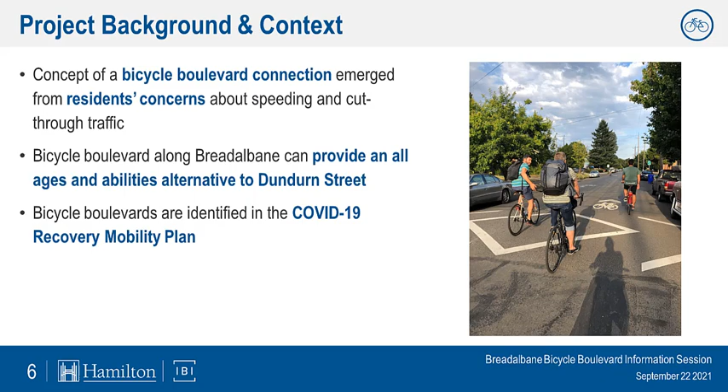So why are we proposing a bicycle boulevard along this corridor? This is really in response to concerns from residents about speeding and cut-through traffic along Breadalbane. We see an opportunity to tie together improvements aimed at managing vehicular speed and volume. This will also help us create an attractive, all ages and abilities cycling route. And I'll note that bicycle boulevards are also identified as part of the city's COVID-19 recovery mobility plan.

Our project objectives include expanding the citywide cycling network with connections to existing east-west cycling facilities on King and York, enhancing corridor safety and livability by calming vehicular traffic volumes and speeds, incorporating beautification, and using a pilot project approach with rapid implementation to grow our understanding of bicycle boulevards and how they work in Hamilton, and to test new design elements.

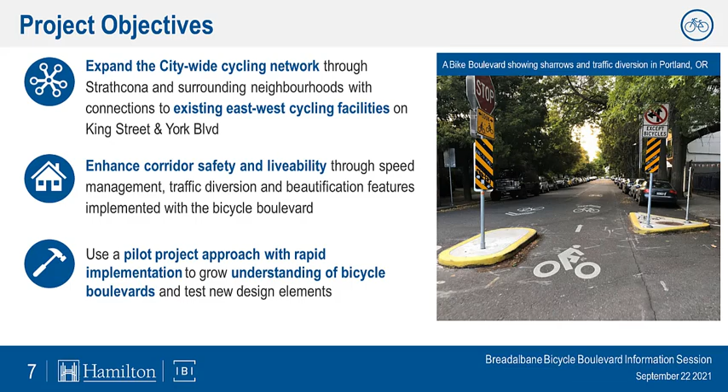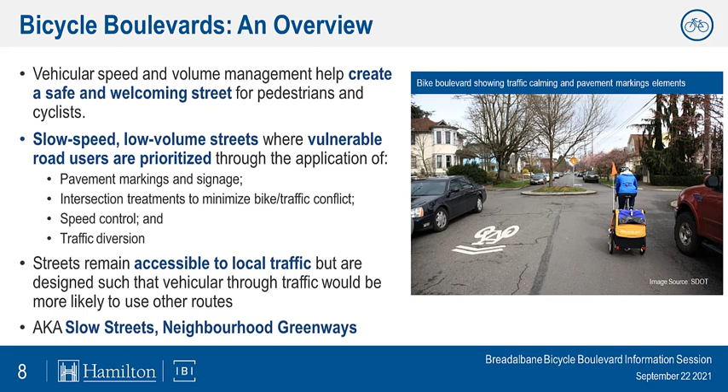So what exactly are bicycle boulevards? These are not the same as other forms of cycling infrastructure you may have seen around the city, such as bike lanes—they do not provide dedicated space for cyclists. Instead, vehicle speeds and volumes are controlled to help create a safe and welcoming street for both pedestrians and cyclists, with cyclists sharing the road with vehicles. These are slow speed, low volume streets that incorporate various treatments depending on operating conditions. You may have also heard these referred to as slow streets or neighborhood greenways in other cities.

So I mentioned the range of treatments that may be considered along a bicycle boulevard. Typically, they will always include the first two levels: signage and pavement markings. These help guide users along the corridor, consisting of wayfinding, directional markers, and bike route signs. Depending on the specific conditions within each block, other elements including intersection treatments and speed management or traffic diversion may also be considered.

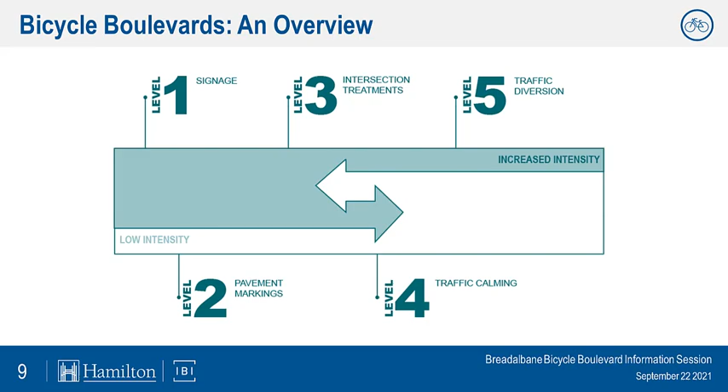So let's walk through the proposed changes along this corridor to give you more detail on how these treatments are proposed to be specifically applied.

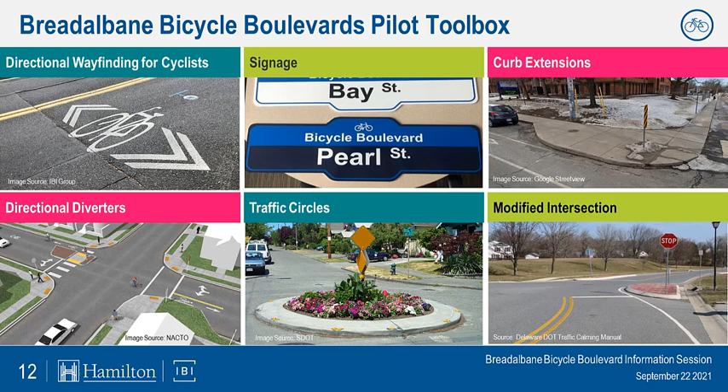So these images illustrate examples of the types of treatments being proposed through this project. The top left shows directional wayfinding markings that help guide cyclists along a corridor. Then we have signage that identifies the route as a bicycle boulevard.

We also are proposing some curb extensions that help to narrow the road, typically around intersections, to reduce and control vehicle speeds. At the bottom right, we see an example of what we call a modified or realigned intersection. These are used at T intersections and they help slow vehicles through the intersection and enhance pedestrian safety.

Then we see traffic circles, which can be used to enhance the public realm, but also help to slow turning vehicles through intersections. And finally, directional diverters, which are applied to restrict vehicular movements in a particular direction while maintaining access for pedestrians and cyclists. These are generally used to help discourage cut-through traffic.

So this project is proposed to be implemented as a pilot project with an opportunity to test the design and adapt it over time. Materials may vary from simple, quickly installed materials to more robust long-term materials, giving an opportunity to test performance. An important element of bicycle boulevards are greening and public realm enhancements, including plantings and decorative elements that would likely be added over time.

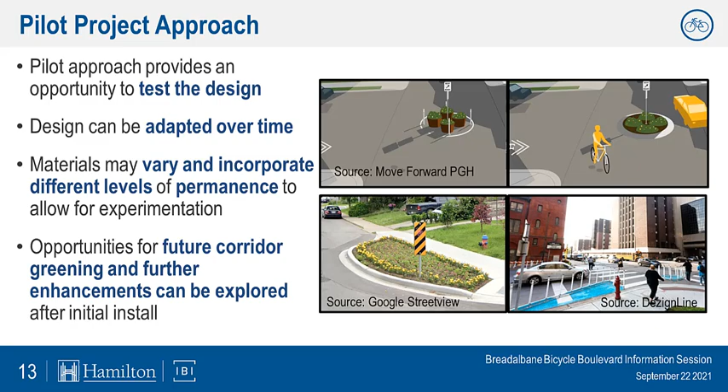Just to show you what that will look like. So obviously we have many residents, I'm sure you're aware, this section of road is currently no entry during afternoon weekday peak periods. And so that would become a permanent restriction, although obviously pedestrians and cyclists would still be permitted to make that movement. So the current left turn, through, and right turn movements that you see here would not be possible by vehicles.

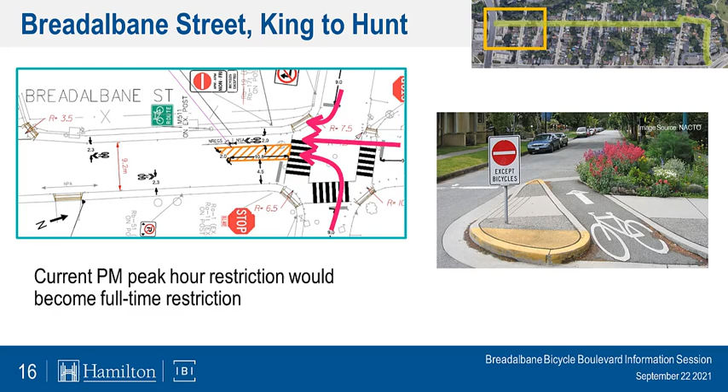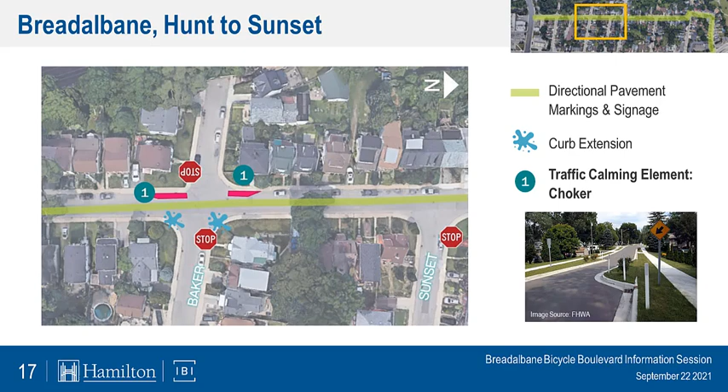Because these features are being proposed directly at the intersection where parking is not permitted, there is no anticipated impact to parking supply from these features. We're also proposing a few curb extensions on the east side of the street, again, to control the speed of turning traffic.

Moving north along Breadalbane to Lochern and Tom, in addition to pavement markings and signage, we're proposing to add a traffic circle at the intersection of Lochern, so you can see an example here, and a realigned modified intersection at Tom Street. Both of these elements will help to slow vehicles through the intersection without impacting parking supply.

And finally, our last section of the corridor, where we have our little jog along Jones and down Woodbine. In addition to the pavement markings and signage, we're proposing a curb extension right at the intersection of Jones and Breadalbane. There are future improvements planned for the intersection of York and Woodbine through a separate project along York Boulevard. With that, I'll turn it back to Trevor to talk about project timelines and next steps.

Thank you, Zibby. In terms of where we are right now with this project, we're in what we call the preliminary design stage. This is where we have the general idea of what we'd like to do, but we want to meet with you, the residents and future users, to answer your questions, get your feedback, and incorporate it into the design.

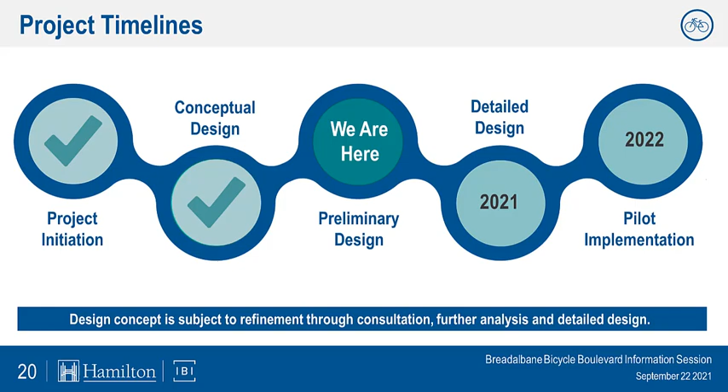Moving forward, we'll be doing more detailed design throughout 2021 and looking towards launching this pilot in 2022. As noted on screen, the design concept is subject to refinement through consultation, further analysis, and detailed design, which is why we want your feedback and comments, to understand what the community's views are.

So as I mentioned, we want to hear from you. At the bottom there, we've set up a comment form where you can submit your feedback. It's available at hamilton.ca/newlanes, which is the page where all the information on current cycling projects in the city is available. You can also submit your comments directly to us via email at sustainable.mobility@hamilton.ca. I've received a number of comments from folks already and I believe I've responded to almost everyone as of noon today, so please share your comments, we welcome that feedback.

We also ask that you submit your comments by Friday, October 8th, which is just a little over two weeks from now. After October 8th, we'll review all the comments, take the input, and start to refine the design. From there, we'll move into detailed design and finalize it throughout the rest of 2021 and early 2022. After that, we'll be moving towards pilot implementation next year, as well as doing ongoing monitoring and adaptation over time.

I'll start with our first question, from Cameron: is this meant to replace the Dundurn bike lanes?

Is there potential to better improve the Breadalbane-Jones intersection? This one's a bit interesting. I'll start, and Zibby, you can add in. Because it's that bit of an offset, it operates as two separate intersections. We try to avoid combining that into one operation because you wouldn't have sight lines available for the different opposing traffic. We are looking at improving the tighter turning radii there to slow down those vehicles coming down. Zibby, any additional comments? I'd be interested for whoever provided that comment to share suggestions about the challenges you're experiencing at that location - it's something we could take back and give thought to. We did consider a realigned or modified intersection at this location, but with the driveway placements across from the intersection it's a little tricky. Certainly would be interested to hear any community suggestions or input.

Thanks, Zibby. From Mark: is there a plan for westbound to York from Woodbine? I'll start this question, then hand it over to Peter Topolovic for additional comments. From my understanding, you're asking if westbound cyclists on York can access Woodbine. In the interim, cyclists would have to turn left at Dundurn and then enter through Jones. There is a longer term project, as Zibby has highlighted, to make improvements there and actually provide that direct connection. Not sure if Peter wants to talk more about that York and Dundurn project.

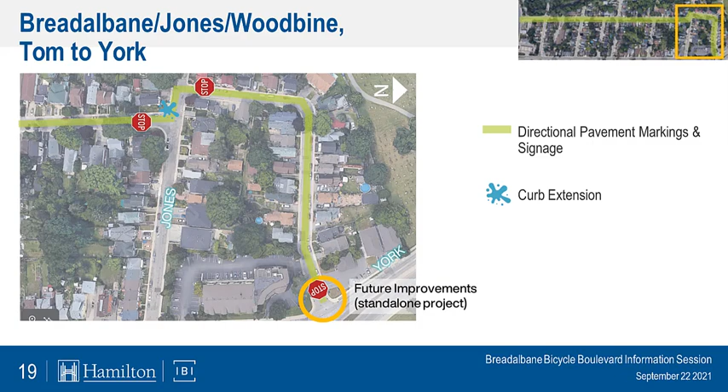Thanks, Trevor. So this project at York and Dundurn is planned for future works in the mid-2025 range. We would come back for more public consultation on this one and work with Mike Field's group as well, as there's a potential to realign the intersection and perhaps provide direct access to Woodbine from York and Dundurn. There have been some planning exercises previously that show different ways we can do that, but more work will have to happen on the intersection. I don't know if Mike wants to add to that, but it's certainly on the table, and we will be coming back. There's no feasibility study for that yet, and the road works themselves have not yet been planned, but there's lots of potential for making changes to that intersection in the near future.

Will this include road remediations? Thanks. Not at this moment do we have plans directly associated with this project to do any resurfacing, that sort of thing. But I know the councillor might have other plans in the future.

Why are you doing all this when this route works fine for bikes and cars? So I can start that question. The Transportation Master Plan set out a vision for how we're going to keep moving into the future, looking towards 2031 and beyond. Similarly, the official plan set a plan for growth. One thing both of them found is that we really need to start finding other ways to help people move, to have a transportation system that works for everyone and supports the growth. As you're probably familiar with, the city did declare a climate emergency, which supports the push towards creating opportunities for others to get around. We really see this as a great connecting link because Breadalbane is a very important link between King and York, providing good access over to the King Street bike lanes to get to McMaster and to downtown and the communities in between. I'll hand it over to Peter if he wants to add some additional comments.

I just wanted to add that Council has unanimously supported principles of Vision Zero, which require us to look out for the best interests of vulnerable road users, which are pedestrians and cyclists as well. So this project is in alignment with the goals and objectives of the Vision Zero commitment.

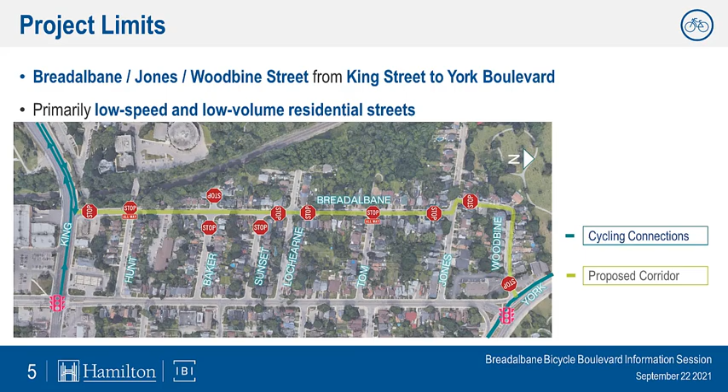Julie's concerned about the folks that live on Hunt that park in behind their homes, and about the fellow who has the garage there, that access for them will be choked off, and that they won't be able to access the rear of their properties. Is there any solutions for those folks, or is that something that you'll take into consideration?

So we have reached out to some of the destinations there, including the cathedral, as well as the garage owner there, to have a discussion and understand their needs and locations. We do agree that it is a challenge with that short alleyway there, and if there are specific comments and concerns, we'd like that, that's part of what today is - the comments we're trying to get to understand concerns, whether we might move that traffic diverter down or make other adjustments to that area. But we are cognizant of the access there, and we would like to hear the feedback and comments if people are actively using their rear alleyways, or if they are using on-street parking, to make adjustments and refinements to the plan.

Woodbine is too small for bike lanes, cars, and parking. So how will that work in that section?

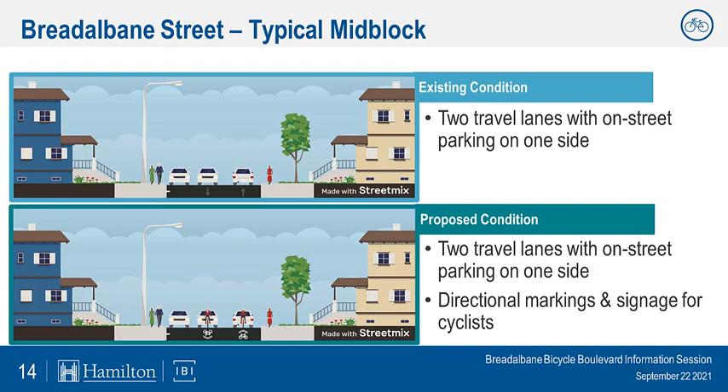Chris is asking, is there potential to allow flow of walkers and cyclists, but cut off automobile traffic completely, like Shaw in Toronto?

I can start and maybe Zibby can add in. I know you've worked more with some projects with the City of Toronto. Our traffic diverter, the Shaw Street example, for instance, closed off the street completely at the intersection. In our case, we're only looking at closing it for that one-way direction to still provide local residential access, for instance at Hunt and Breadalbane. So it's partially similar to Shaw Street. As you know, some of the comments we received today, we are cognizant that residents still need to be able to access their home, and doing that directly from some of the other streets may not be desirable.

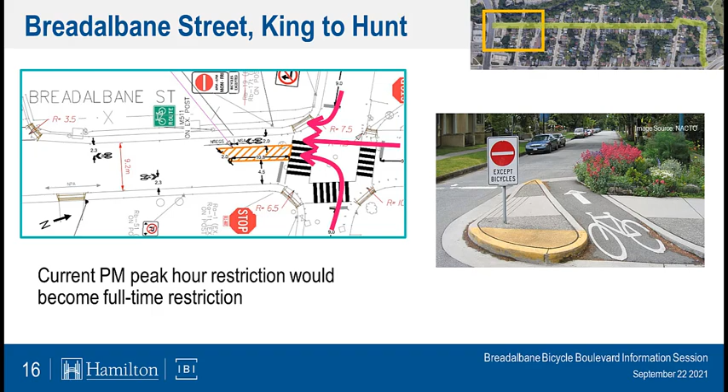Have you considered that the other changes will alter the amount of cut-through traffic? I don't quite understand that, I might be reading it incorrectly. Can you see it, Trevor? I think the comment might be suggesting that the traffic diverter will mean some folks who come down Breadalbane to get to King will now end up on Hunt. I think it's fair that there might be a bit of an education period, but we can put up signage to enforce that you can't do that cut-through anymore, to really emphasize that beforehand, to get those vehicles off Breadalbane and the side streets and reduce those volumes as intended.

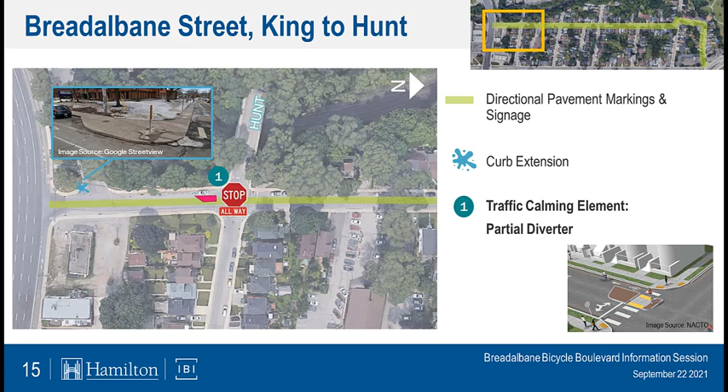How much money is allocated for this project? So we do have some funding through the existing Bike Boulevard budget for the city to do the design and implementation. It's already part of our normal budgeting process, so there'll be no impact. It's similar to other cycling projects we do across the city.

Could snow clearing be brought to cycling infrastructure standards, occurring more quickly? Will the diverter receive snow clearing despite its tight width? I can answer that question. Bike lanes are required to be cleared the same way as driving lanes, and that's something we're working on making sure occurs. With that considered, the diverter, or the area between the sidewalk and the diverter, would be cleaned to that same level of service as well. Thanks.

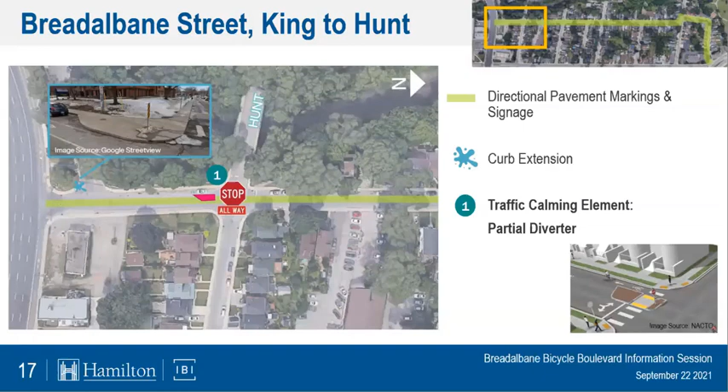All right, from Ed, on slide 20, Zibby: people do park in front of Tom Street Park. Is this in fact an illegal parking area? Yes, so under the city's bylaw, there's no parking allowed on street in front of parks. So this is somewhere where parking and bylaw enforcement can ticket a vehicle for being parked there.

Can there be consideration for speed humps to be added along Breadalbane, especially near Tom Park? You may want to show them what you're trying to do at Tom as well. As part of our other improvements at Tom Park, we're looking at what's called a realigned or modified intersection, shown in the bottom right corner, where the curbs would come out. This has benefits to pedestrians because it would shorten the crossing distance if you're crossing Breadalbane, as well as slow down traffic. We did do some speed studies, but there weren't significant speeding issues found. However, we can take that comment back and look at it further if there are concerns about speeding in that area.

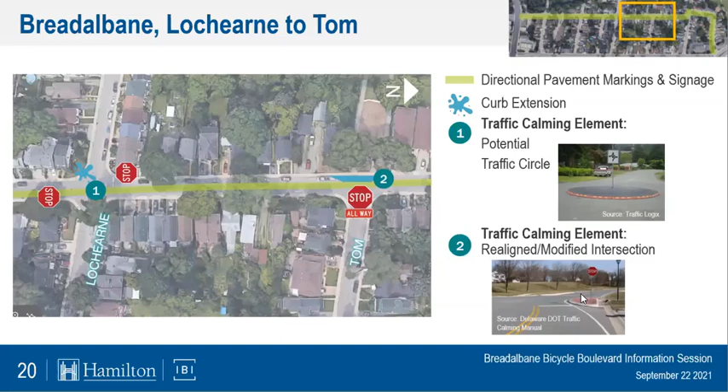Okay, question here: concern about Woodbine, that the street is not very wide, especially with on-street parking. Is there consideration of turning the Bike Boulevard to the right on Jones and then off to Dundurn, rather than taking it up Woodbine?

So going across - that's good feedback, and we can look into it. I think the reason we're interested in that Woodbine connection is, as Peter mentioned before, there's a project being considered in that area that would provide better connectivity. That little stretch of Dundurn from Jones to York is not the most comfortable - it has higher volumes of traffic. So it's not an ideal place if we're looking towards creating that all ages and abilities cycling network for folks to feel more comfortable cycling. York is a bit more buffered with the bike lanes there, but the Dundurn stretch is narrower and may not be as comfortable for everyone who cycles.

Zibby, do you have anything else to add to that comment? Sure, I can just chime in that we've really emphasized that we're not trying to provide separate space for cycling, so vehicles and cyclists would be sharing that space. If it's a narrow section, we'd probably envision single file operations. But through our traffic calming interventions, we're trying to create a street where bikes and vehicles would be traveling at roughly the same speed anyway, which will help with that negotiating and sharing of space.

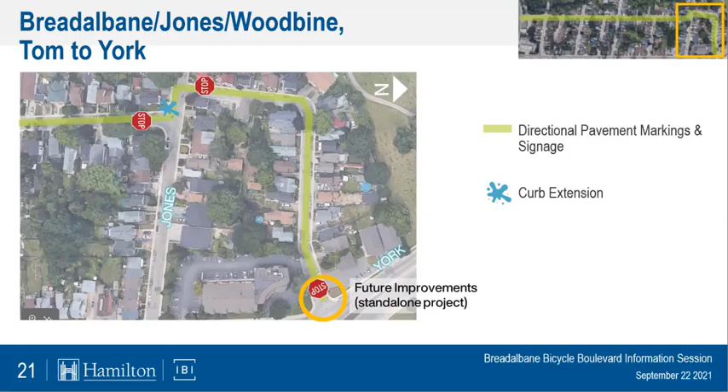All right, I think we're getting into comments now, which will all be recorded. So our speed limit's going to drop.

As part of the city's Vision Zero, there is a neighborhood speed reduction pilot or program underway, and Strathcona is slated for 2022. Part of that program is that across the city, speed limits are being lowered to 40 kilometers an hour, and 30 kilometers an hour within school zones. This neighborhood is earmarked for that, happening within 2022.

Is there a possibility of having speed bumps on the street for calming purposes? We can look into that. One concern is making sure they're the right size so we don't impact street parking or lose spaces on the streets. But it's something we can look into, as it has come up in a couple of comments.

Monica's asking, with bump outs, how many parking spots will be lost? The plan with the bump outs is they would only be limited to the space it's not legal to park in already, so there'd be no loss of parking in that section. The only place we anticipate a lost parking spot is where the traffic diverter is south of Hunt, where we anticipate one lost spot, but everywhere else all legal parking will remain.